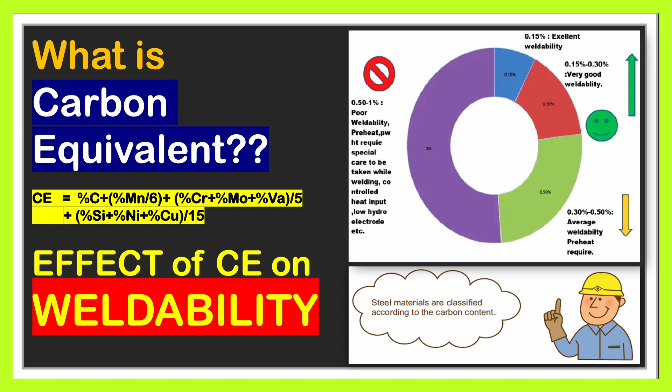If it is less, what happens? If it is more, what happens? What are our concerns as a welding inspector, supervisor or manager to take care of? Let us chit chat a bit. What is carbon equivalent? Understanding the carbon equivalent.

The weldability of steels is influenced primarily by carbon content. At higher carbon levels, steel may need either pre or post weld heat treatment in order to prevent stress buildup and weld cracking. Generally speaking, if the carbon equivalent is 0.35 or below, no pre or post weld thermal treatment is required.

In our experience with maintenance welding, we have found that preheat was beneficial between 0.35 to 0.55 carbon equivalent. Above 0.55 carbon equivalent, we usually do both pre and post weld heat treatment to relieve the stresses and prevent cracking. So carbon equivalent for welding of 0.35 maximum is a boon or gift for us. No need to worry about weld cracking because of hardened steel.

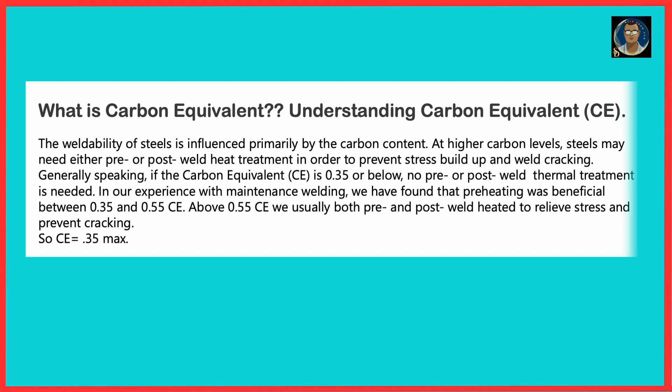It is percentage of carbon, of course, because it is carbon equivalent, plus percentage of manganese divided by 6, plus chromium, molybdenum and vanadium percentage together divided by 5, plus percentage of silicon, nickel and copper divided by 15. This formula one should learn when we are talking about carbon steel, its alloys and their weldability.

In the formula we can see 6 points of manganese are approximately equal to 1 point of carbon. 5 points of chrome, moly and vanadium are roughly equal to a point of carbon, while it takes about 15 points of silicon, nickel and copper to get about the same effect as 1 point of carbon.

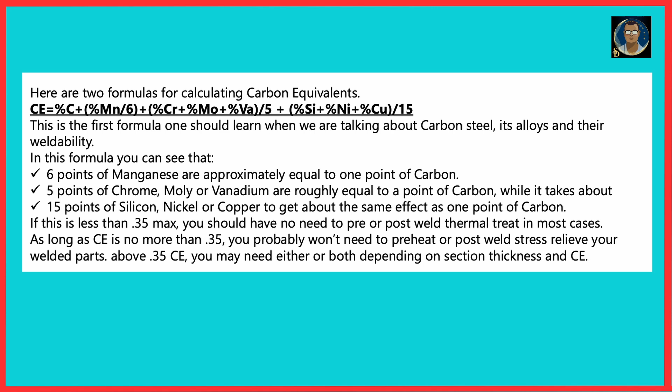As long as carbon equivalent is not more than 0.35, you probably won't need to do the preheat and post-weld heat treatment or stress relieve your weld. Above 0.35 CE, you may need either or both depending on the section thickness and carbon equivalent. So not only carbon equivalent: if we want to decide whether pre or post weld heat treatment is required, thickness is a very important point to be considered.

Carbon equivalent is a crucial metric used to assess the weldability of steel. It provides simplified measures of how alloying elements, particularly carbon and other hardening elements, affect the steel's tendency to harden during welding. Higher carbon equivalent values generally indicate a greater propensity for hardening, which can lead to potential issues like cracking or distortion.

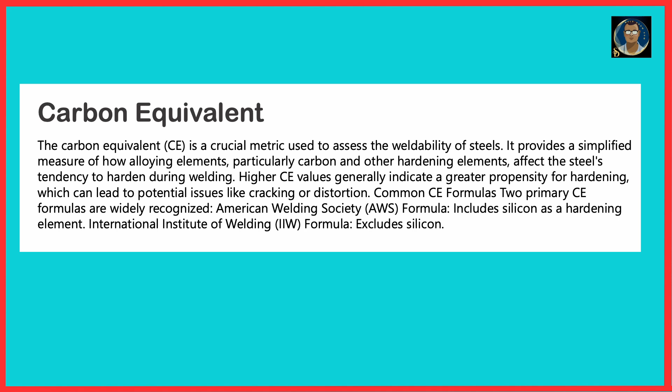Common carbon equivalent formulas: two primary carbon equivalent formulas are recognized. One is the American Welding Society formula, which I just discussed, which includes silicon as a hardening element. The International Institute of Welding also has a formula, where silicon is not considered during carbon equivalent calculations.

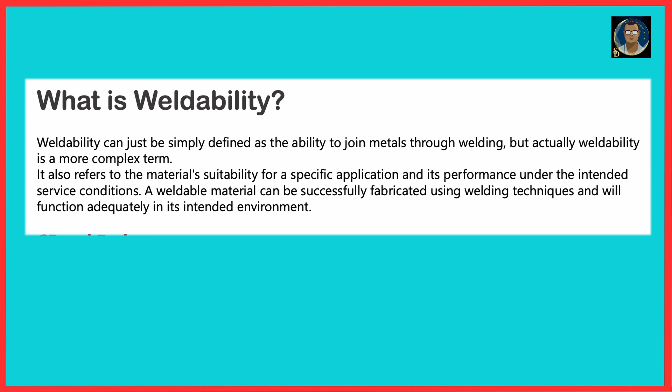What is weldability? Weldability can simply be defined as the ability to join material through welding. But actually weldability is a more complex term. It also refers to the material's suitability for a specific application and its performance under the intended service conditions. A weldable material can be successfully fabricated using welding techniques and will function adequately in its intended environment.

Now, carbon equivalent and preheat. Let us see the connections. Lower carbon equivalent values generally correlate with better weldability due to reduced hardening tendencies. Preheat and high carbon equivalent: for steels with high carbon equivalent values, preheating is often necessary to prevent excessive hardening and potential cracking. Preheat helps to control the cooling rate and reduce the risk of rapid cooling induced hardening.

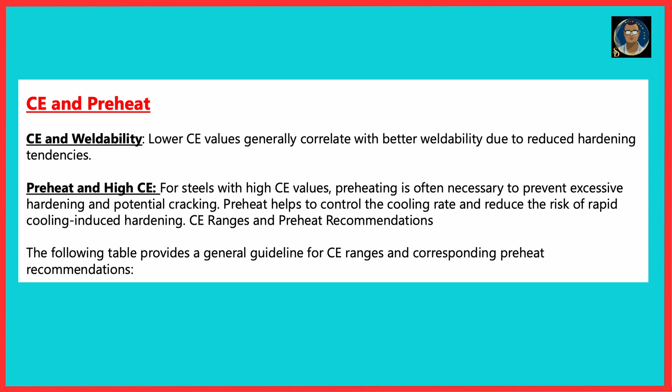So if we cool rapidly, the material will have a tendency of hardening. So we need to preheat the material before welding so that it will cool slowly and the chance of hardening will be reduced. Carbon equivalent ranges and preheat recommendation.

Here is a table which provides a general guideline for carbon equivalent ranges and corresponding preheat recommendations. You can see in the table the formula from AWS which we have just discussed, and then the formula from the International Institute of Welding. The only difference is they are not considering silicon in the second one. AWS uses manganese plus silicon divided by 6; the IIW formula uses manganese by 6 only. So they are not considering silicon in their formula.

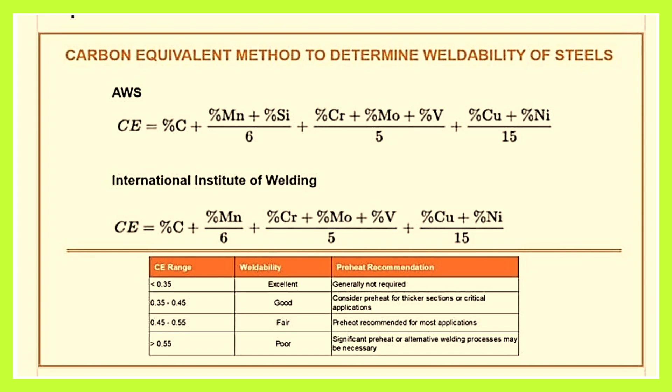I told you that below 0.35 carbon equivalent, it has excellent weldability; generally preheat is not required. 0.35 to 0.45 is good weldability; consider preheat for thicker sections or welded parts to be used for critical applications. 0.45 to 0.55 is fair; preheat recommended for most applications. Greater than 0.55 carbon equivalent, we have poor weldability; significant preheat or alternative welding processes may be necessary.

Understanding carbon equivalent and weldability. Carbon equivalent is an essential predictor of steel hardenability, weldability, and hydrogen induced cracking. So we are going a little bit deeper to understand the direct connection between carbon equivalent and weldability.

However, welders do not have a basic understanding of how carbon equivalent predicts steel properties, whereas few of them have a hazy idea, rough idea. I mean, the majority of them have not heard of carbon equivalent before. It is no wonder most welders turn away most jobs involving low alloy steel under the pretext that those steels are difficult to weld.

Welders will tell you, and claim from experience, that those metals are hard and can easily crack during or after welding. When repairing a natural gas or oil pipeline, you need to ensure that a new weld is absolutely solid. On a basic level, the integrity of the weld relies on the two pieces of pipe being completely compatible. If the two pieces of pipe behave differently or become brittle during the welding process, the weld will definitely fail, right? With potentially disastrous consequences.

So, you need to ensure you are using the right grade of steel. But relying on grade alone is risky, because even within a grade, the exact composition can vary enough to cause problems with the weld integrity. This means you will have to measure the exact composition of each piece individually to fully understand how the component will behave. This is where the carbon equivalent concept comes in.

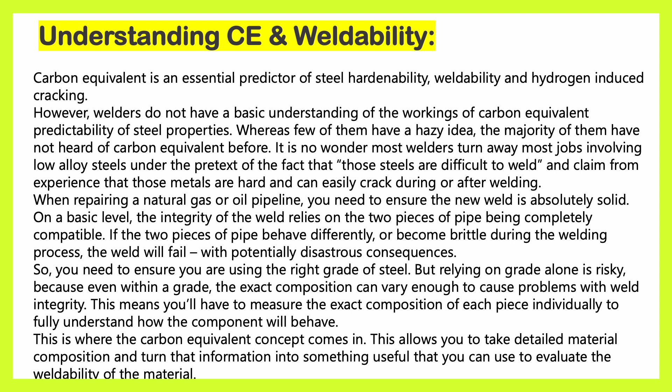This allows you to take detailed material composition and turn that information into something useful that you can use to evaluate the weldability of the material. Carbon equivalent is the key to predicting steel behavior. The equivalent carbon content concept is used on ferrous materials only, because we are talking about carbon. So in ferrous material, where carbon is present, typically steel or cast iron, it determines various properties of the alloy when more than just carbon is used as alloying elements.

It is well understood that carbon levels within the iron or steel affect their strength and brittleness and how the material can be worked and welded. However, carbon is not the only alloying element, and other elements also contribute to material properties. Percentage of carbon, of course, will affect the strength and brittleness of the material, we know that. But how other elements affect it is our question or discussion here.

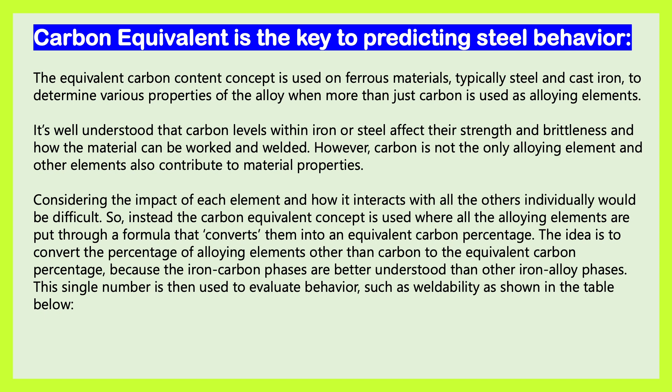Considering the impact of each element and how it interacts with all others individually would be difficult. So instead the carbon equivalent concept is used, where the alloying elements are put through a formula that converts them into an equivalent carbon percentage. The idea is to convert the percentage of alloying elements other than carbon to the equivalent carbon percentage. Because iron-carbon phases are better understood than other iron alloy phases, the single number is then used to evaluate behavior such as weldability, as we have discussed with the help of many tables. You can see in the table that the larger the carbon equivalent, the poorer the weldability.

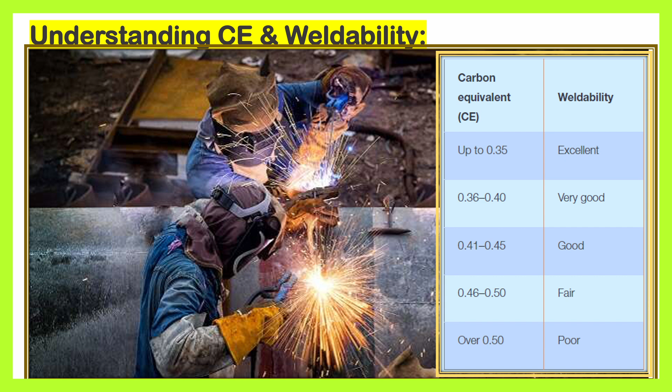So how do we arrive at this number? That's where the carbon equivalent equations come in. Out of these 5 equations, we need to use the one that closely matches the type of your steel. So it does not matter which one is right or wrong. It is actually based on your steel. Let's say the International Institute of Welding, I told you they are not taking silicon into consideration. So you can see percentage of carbon, then manganese by 6, chromium, molybdenum, vanadium by 5, copper plus nickel by 15.

Stop this slide to check the other formulas. You can take a screenshot of this if you need an idea of what the whole world thinks about carbon equivalent and their formulas. So you need to adopt what is appropriate for your steel, and you just put in the percentage values you get from your MTC, and then you can recheck that the carbon equivalent calculation done by the manufacturer of the steel or pipe is correct.

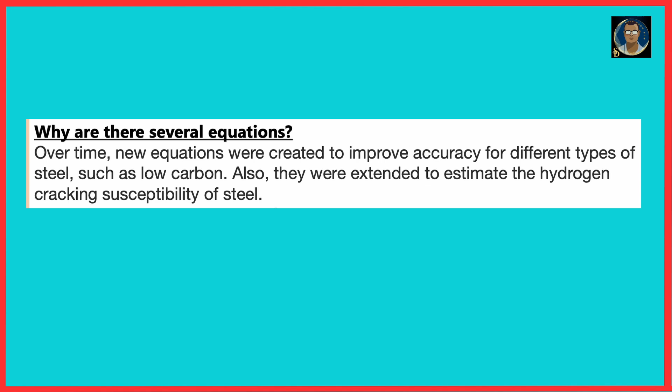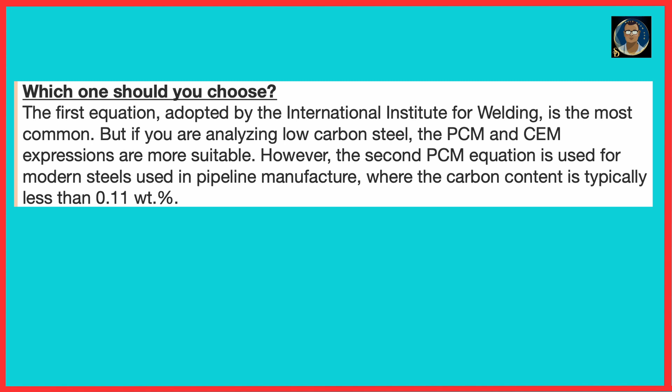Why are there several equations? As I told you, different countries derive their own formula. Over time, new equations were created to improve the accuracy for different types of steel, such as low carbon, and they were extended to estimate the hydrogen cracking susceptibility of steel. Which one should we use? The first equation adopted by IIW is the most common. If you are analyzing low carbon steel, the PCM and CEM expressions are more suitable. The PCM equation is used for modern steels used in pipeline manufacture, where the carbon content is typically less than 0.11%.

What do we actually need to measure in my pipe? To accurately determine the weldability of the pipeline, you will need to measure the elements within the PCM equation: carbon, silicon, chromium, copper, nickel, molybdenum, vanadium and boron. You might also need to measure the phosphorus and sulfur to give a more comprehensive analysis, and nitrogen will need to be measured if you need to identify duplex steels.

So what we learned from here: if we are a welding inspector or a mechanical inspector in pipeline or piping construction, we will always prefer a steel, though it is not our decision. Actually, it is decided by the designer. But we will first check the carbon equivalent. If it is less than 0.35, then no need to worry about preheat or post-weld heat treatment. This is excellently weldable material, very rare chance of cracks.

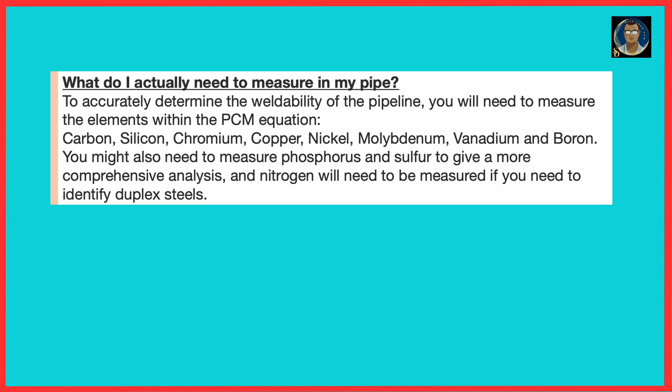But if it is 0.35 up to 0.55, maybe preheat can be done, and based on the thickness, if the thickness is more than 1 inch, or for the pipeline 25 mm, we will also have to go for post-weld heat treatment. It will also be recommended by the designer. And if the carbon equivalent is over 0.55, then without any question, preheat and post-weld heat treatment need to be considered. Of course, thickness is another point of consideration to decide the post-weld heat treatment.